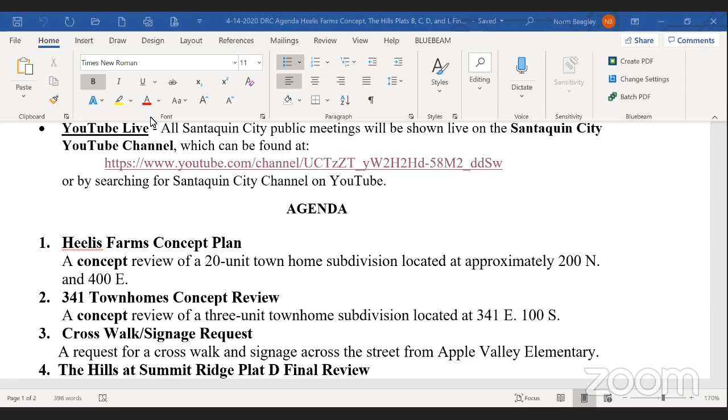Just maximize it, there you go. Okay, so we have Heelis Farms, this is the first one on the agenda, we'll just go around the table. Want to sound check Jared and Scott? Jared and Scott, are you guys with us? Yes. Jared West, Scott Peterson, are you with us on this call? I see Jared. Audio on, Scott was there but now I don't see him. Penny, can you turn on Jared's audio? It is on. Okay, we're going to go ahead and go, Jared, hopefully you can hear us.

We're going to go ahead and start on Heelis Farms Townhomes. This is the development on the north side of 200 North and east of 400 East, just north of where the grocery store is going in on the north side of 200 North. We'll go ahead and go around the room and discuss any concerns or thoughts that you have.

Taylor Sutherland with Fire: both driveways here are in excess of the 150 feet, they're both right around 200 feet. So those would both need to have approved fire apparatus turnarounds, or possibly be connected in some way. Along with that, with the width of the driveways through there, there will need to be no parking signs posted on at least one side of those driveways, on the buildings themselves. That's all I have.

Chief, first? I don't have anything.

Public Works, Wade Eva: You've probably got red lines on all the utility plan, right? We do, yeah. And what about the approaches for those driveways, as far as dropping off that 200 North, isn't that fairly steep? Yeah, they'll have to overcome the grade elevation as they come in there, they'll just have to overcome that. Okay, if you've got red lines on the utilities, that's all I got.

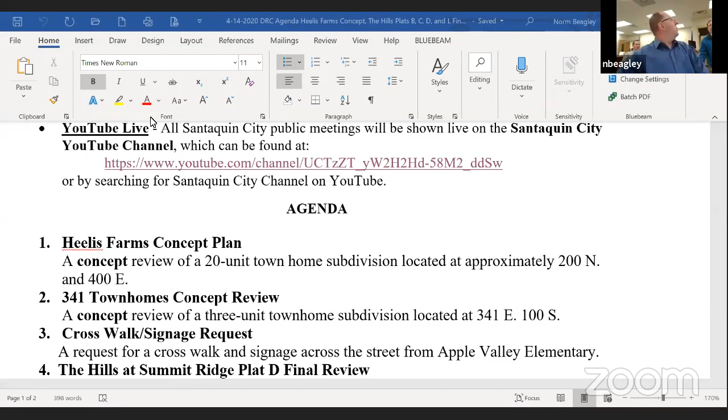Anything from building? Just one question: is that first driveway closest to 400, is that a good distance away from the intersection up there? Is that a problem with the intersection? Sharing the agenda, it's just so you know, I don't know if that matters, but it's not going to show. Okay, I'll stop and share the other one. Thank you.

So now we should have the plans up. As far as the distance on that goes, there is no minimum distance that we necessarily have. We typically like to have 150 feet, but this one is not going to be able to make that. It's not a city requirement or a transportation requirement, that's just a norm that we try to hit.

But in this situation they're not going to be able to have that, obviously. I guess we could look at, with Taylor's comments, maybe doing some type of access up north of lot number 5, where it would come out on 4th East or something of that nature - that might work. That's something the engineering firm might be able to consider, just to get that connectivity we're talking about. Okay, anything else, Randy? No, that's all.

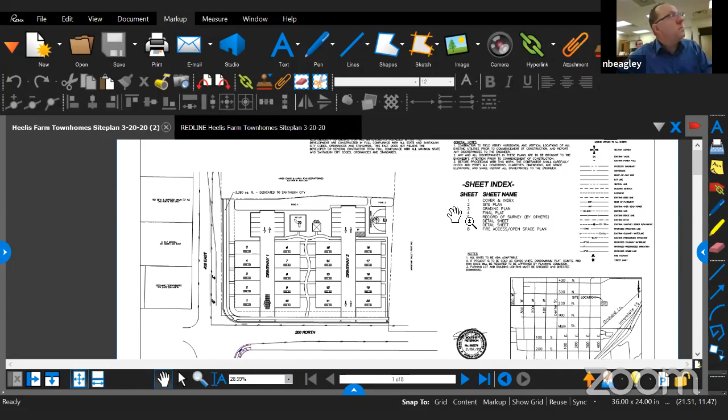Okay, Planning and Zoning. I think it's a good reminder that this is a concept plan, so there's no action taken today. This is just feedback that we're giving the engineers and the applicant so they can do what they need to on the plans to prepare for a preliminary plan. So there's a number of comments from both planning and zoning and engineering, and a lot of it's just generic stuff to give them the guidance they need to work on their preliminary plans.

Just a side note - maybe it's mentioned in the red line - but architectural review will be required, and it can happen really any time in the process. Before preliminary goes to planning commission and city council, it's generally best to do it then, just because both those bodies like to see what the building's going to look like as they review it.

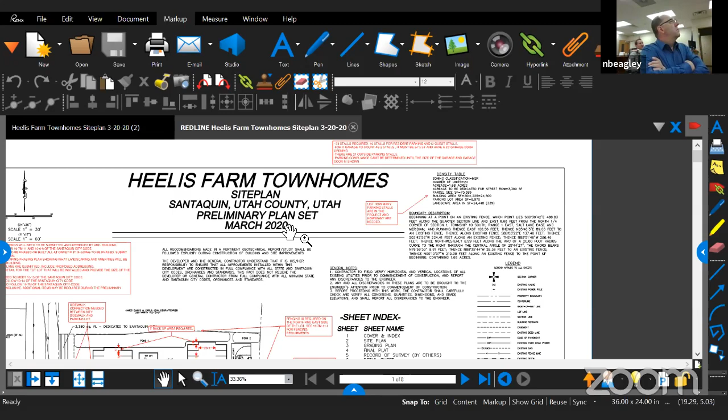Yeah, there's not really much else for us to specifically bring up. We have the generic red lines on there, but not anything that is a really poignant comment that needs to be made in DRC.

Okay, so with that, what I would recommend is, since we're not seeing representatives being able to communicate, Jared and Scott, maybe rather than going through each one of these red lines during DRC, we'll go ahead and email them to you and provide that feedback, and then you can resubmit accordingly with the preliminary plan if you'd like to go that way.

Scott, can you, are you there? Yeah, I'm here. Okay, can you hear? Does that work okay for you guys? Yeah, I can hear you. Well, I think we're fine, unless there's any, I don't know without looking at them, but we can take them and get back to you if we have questions.

Hey Norm, since Scott's in here now, I think the biggest red line for you, Scott, is going to be from fire. So, sorry, Taylor, I wonder if maybe you could repeat your comment, because that's going to be the most impactful red line.

So on both driveways, where they're dead ends, they're both in excess of 150 feet, closer to 200. So those would both require an approved fire apparatus turnaround at the end of them, or some type of connectivity to make it a loop, not a one-way dead end kind of deal.

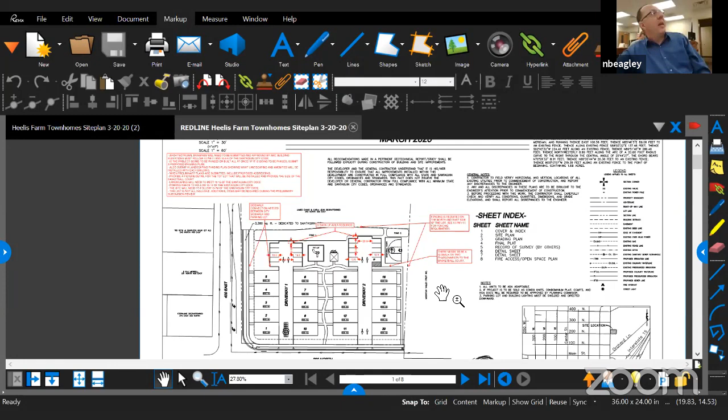Okay, great. And everything else, again, with Jason indicating, everything else is planning and zoning and engineering, just at the preliminary level or the concept level. And we'll just give it back to you, and you can address those comments accordingly. Great, thank you. Okay, thank you.

We'll go ahead, if there's no further discussion, we'll just go ahead and send those back. This is, Scott, this is a concept, so there is no action by DRC. We just give you comments and then you can come back and resubmit accordingly with your preliminary at some point in time.

Okay, and then what about concept, because they go to planning, right? That's correct. So from this point now, Scott, we'll set a public hearing and we'll plan to have you on the planning commission meeting 2 weeks from now. If you can address some of the red lines, that would be great, but it's not required. It's just going to be more additional feedback from the planning commission members.

So obviously there's some things that would need to be looked at a little bit closer that might change the way this flows and the way it's shaped. My understanding is that you guys have more parking than the minimum requirement. I guess you have the qualified 24 by 24 garages, which counts towards 2 parking spaces. So I don't know if you have the option for a hammerhead at the end of those. Those types of things would be good to see as it moves forward.

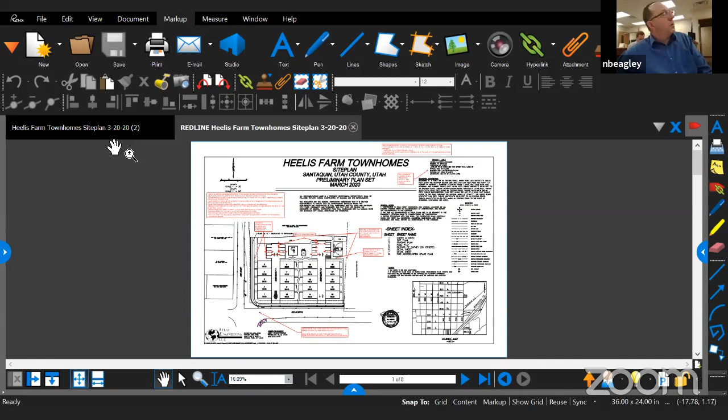Okay, great. Thanks. We'll try to get the site layout updated before then. Okay. All right. Thank you. Thank you.

All right, give me just a minute. We'll get the next one coming up. On the agenda is the 341 townhomes.

We would, Penny, if I'm not sure who the 385 number is there. Do we have a confirmation on that, or do we know what's happening there? Ryan, I'm seeing 385 215 5838. Let's see if we can get that one online.

Norm, I'll find out who that is if you would like. Okay, that'd be great. Ryan Hatfield could be admitted on that one. He's representing the developer on that one, Penny. You can go ahead and take Jared West off as well.

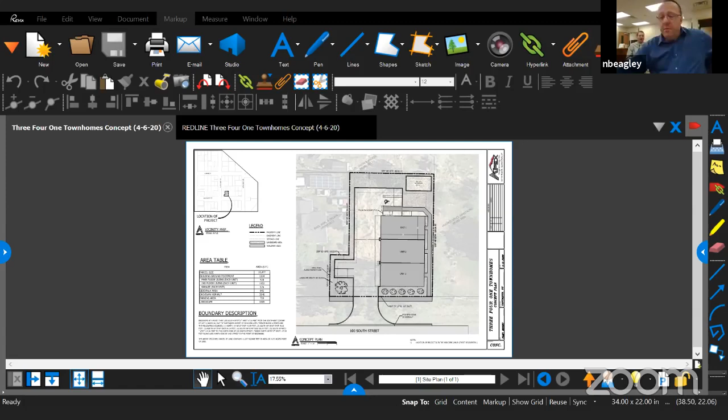Yeah, I was just going to say, it's the same thing as the last one, just feedback. There's not any action being taken today. So again, we have a number of very generic red lines to give them some direction for preparing for preliminary. I guess a couple of things to realize is because this is only 3 lots or less, this could go through a process where the planning commission provides the approval. So that could be a little bit of an expedited process for them.

Let's see. So Ryan, we'll do the same with you on this one. We'll send you the red lines. This is a concept version, and because of that, there's no action taken by DRC today. We will just provide you with the red lines, which are mostly things like parking, right-of-way, landscaping, those types of things. You have any questions on that?

Ryan Hatfield, do you have any questions on that? No, can you hear me? Yeah, I can hear you. Okay, no, I think that's pretty basic. I appreciate your time. I think that's what we were looking for. So I don't have any questions at this time.

Okay, Norm, the other note I was going to make was they don't show a usual trash enclosure for like a dumpster like we've seen with multifamily units. However, with it only being 3 units, they have a designated area for trash, which we're assuming they're going to propose to have 3 cans. I think because it's only 3, I don't have a problem with having 3 cans out on the street. So that's something they provided, and we're assuming that's what they're proposing. But yeah, we're asking for some clarification on that, what style of trash enclosure, because that enclosure is not large enough for a can, and you couldn't get a truck in there anyway.

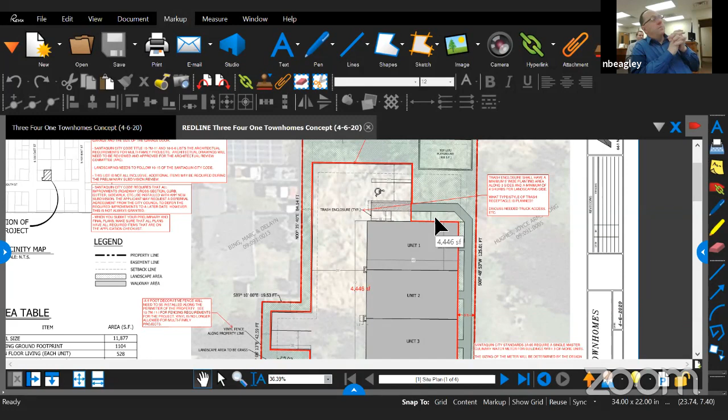Any further comments at this point? Okay, we'll go ahead and send you those red line comments, Ryan. Okay, I appreciate that. Norm, one more comment for you, Ryan.

Because of the zoning you're in, you're going to be required to provide architectural renderings for this. It's not a regular schedule that we have for the Architectural Review Committee, or ARC, it's just on an as-need basis. So if you can look at the code, look at the architectural requirements for the MSR zone which you're in, and provide us some architectural renderings with the details so we can make sure those requirements are being met, we'll work with you to set up an ARC meeting and get your renderings approved. But it's best to start doing that now. We prefer to have those architectural renderings approved before they go to Planning Commission. I guess it's not even going to go to City Council because it could be an expedited process. So we want to see those sooner than later before you go to the Planning Commission for them to consider giving you approval of this subdivision.

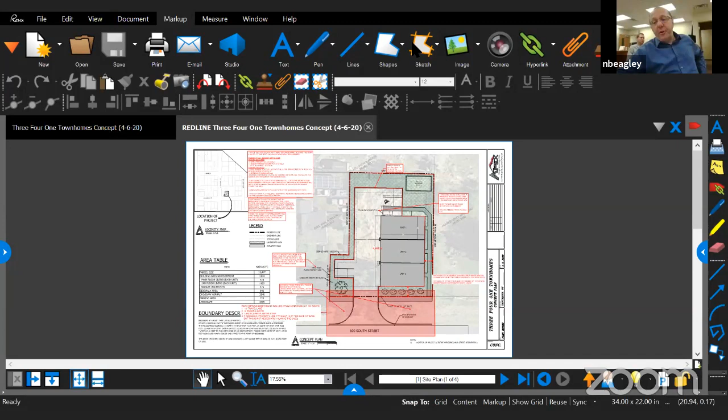However, also keep in mind that should the developer seek a deferral agreement, that would have to go to the council. Correct. Okay. All right. Thank you. Sounds good. Have a good one, have a great day. You too.

Next item on the agenda is the crosswalk request for the area right in front of Apple Valley Elementary. Sorry, I'm getting confused on that. Can you bring up... I'll go ahead and bring up the email. Can you bring up a map? Yes, thank you, maybe in theory.

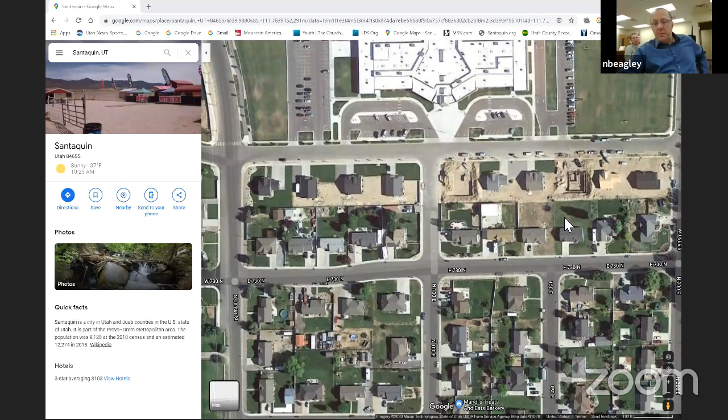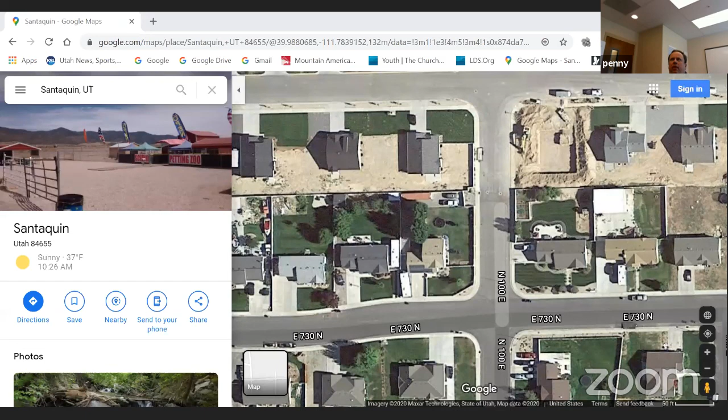Okay. I'm assuming the Bentleys haven't called in on this one. No, no. So if I could kind of walk us through that one, if that's all right. Yeah, are you good? Are you seeing that now, Ben? I am now, yeah. Okay, I can't see the whole school, but that's okay.

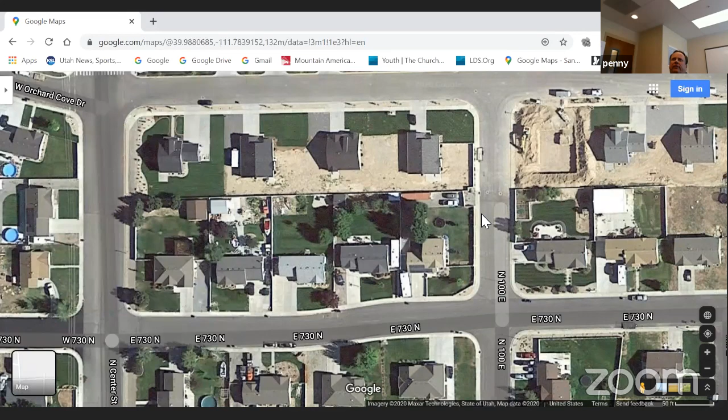The request that came in, perfect, that's great. The request that came in from the school, or from Mr. and Mrs. Bentley, was to have the city repaint the crosswalk that comes out of the main entrance of the school and crosses at a little bit of an angle to that road right there where the mouse is. Originally that was painted, and that paint has long since been removed from the road through snow plowing and other effects, but was never repainted because at the time there was not a sidewalk on the homes on that north, excuse me, south end of that road.

Sorry, I'm getting feedback on myself. Anyway, now that those homes are there, the sidewalk is there. I reached out yesterday to Principal Argyle. He would greatly prefer to see that repainted, and indicated that the school district, him, and his teachers would be manning that in the afternoons. Of course, we don't need to repaint it right now until school restarts, but if the city would be willing to do that, they would make sure the kids are safe in traversing it.

The second discussion requested by the Bentleys was that intersection just south and across the intersection. When we as staff were looking at that originally, we thought that was an unmarked intersection, but in fact it is marked, it does have stop signs going north-south. We can't go out and look at the traffic patterns as they exist when schools open because of the COVID-19 issue, so I reached out to a neighbor of that intersection on the northeast side, Councilmember Nick Miller, to ask his impressions of it, and whether that needs to be controlled. Normally with MUTCD standards, we would recommend that the control would actually be east-west, not north-south.

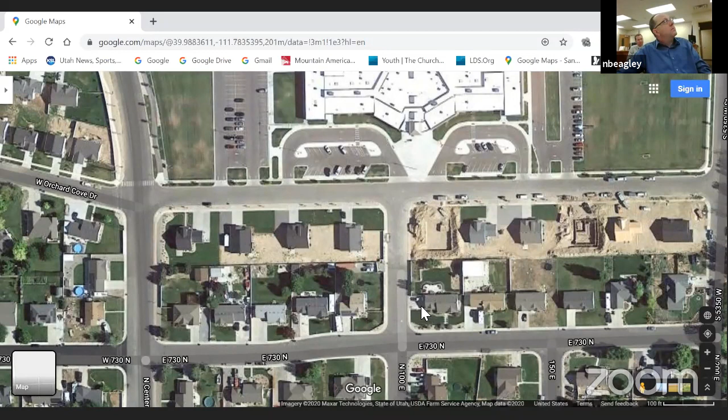Okay, so we have a motion. Do we have a second? I'll second. Second by Rod. Any further discussion? If not, all in favor, say aye. Aye. Aye. Any opposed? Okay, that's unanimous. Thank you.

All right, next item on the agenda is the Hills. We're going to look at 4 phases of the Hills. This is the subdivision just to the west of the railroad tracks on the south side of Summit Ridge Parkway. So I'm going to open up those drawings now. You want to let in who's there? Yeah, let's go ahead and bring Sean into that. Penny.

Okay, so we're going to the Hills, Summit Ridge, getting that open now. Thank you for your patience.

On the agenda today, we have plats C, D, L, and F. Are you there, Sean? Can you hear us? I am. Can you hear me? Yep, great. How's it going, guys? Good, thank you.

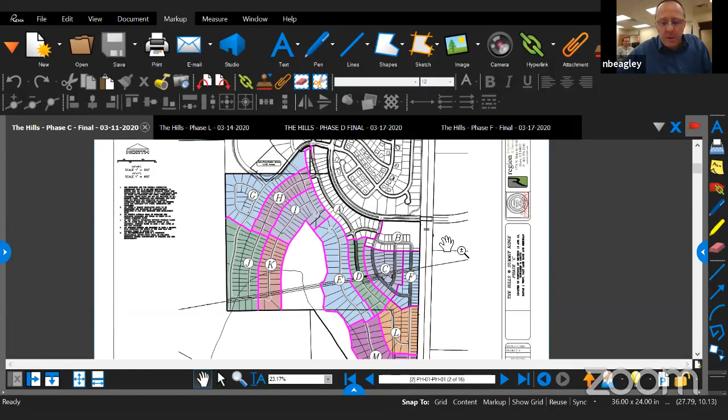That's all I got. We have red lines for some address adjustments, but they're on the red line form. Okay, so we'll send those red lines to you, Sean, for the addressing. And for the sake of time, I think we'll just run through a few of the red lines and then send them up to you so you can consider that to get things going. Does that work okay for you, Sean? That would be great, yep.

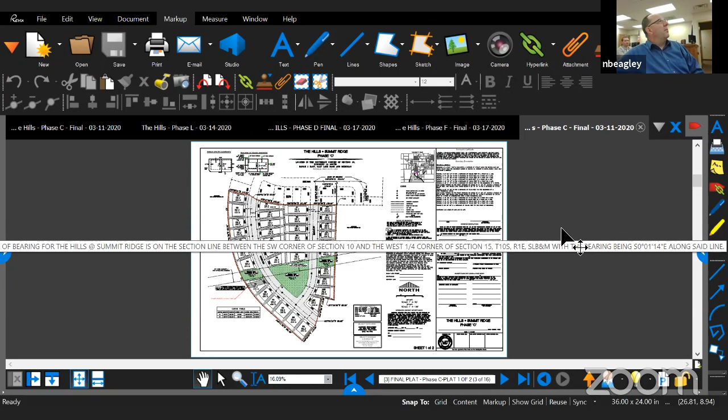Okay, so I'm going to open up some of the other - first we'll look at C. I think the biggest thing with C is that you're still showing the connecting road that's now not going to be constructed, that would connect C to D at the end. That is probably really the biggest concern that we have. And then also some changes on the open space.

The open space is currently under consideration for some changes under the current development agreement that's being amended right now, and we'll have you change those notes accordingly, Sean. To where the open space and the dog park is not going to be owned by an HOA, it's going to be owned by the city, but the developer would improve and maintain accordingly on those areas.

Again, that's - okay, go ahead. I was wondering about that, because was that on council last week? It was on council last week. We're still going back and forth on a few items between attorneys for the developer and attorney for the city. We're very, very close on that and anticipate having that amendment signed within the next day or two and recorded so that this can move forward.

Okay, so owned by city, maintained by developer/HOA, and also improved accordingly. So the dog park would be fully improved, the trail system would just be improved with seating and the trail system that goes through there according to the old amendment. To be clear, Norm, the power line easement, none of that's being dedicated to the city, correct? No, it is. It is? Yeah, okay.

The power line easement and the dog park would get different credits for those. The one is minimally improved. The trail and corridor underneath the power lines would be minimally improved with a road-based trail and reseeding, basically an open space type situation.

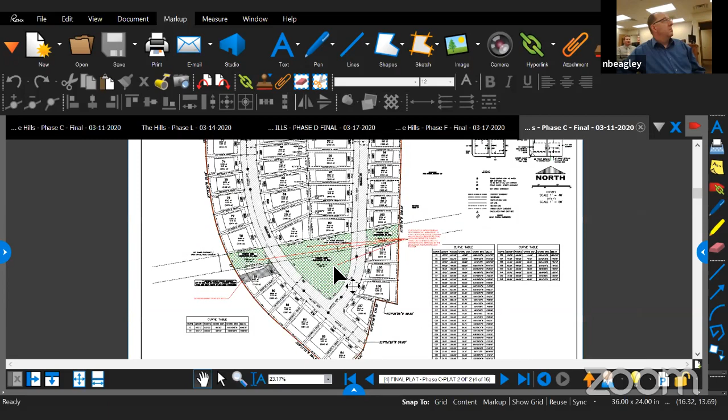Good. Okay, Sean, I was just gonna say, that note on there was just making sure that you're labeling those park areas appropriately, because it still says common area. Make sure it says dedicated to the city, maintained and improved by the HOA as per the development agreement, something along those lines. Okay, thanks.

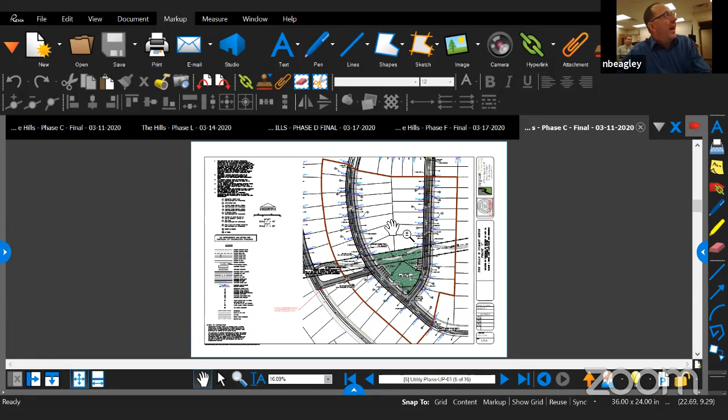Okay, so Sean, also you're still showing a road through here that was, I think, contemplated before between Plat D and Plat C. That's not going to be constructed, is that correct? Correct, yeah, I think these were turned in when that was going to be the way. Okay, that's our understanding as well. So again, there's probably some line work and some pages, or at least one sheet in there, that probably doesn't need to be there.

Okay, with that, if there's no further discussion, I'll look for a motion on this. This is just for Plat C. Yeah, this is final, this is correct. And as Ben indicated, the motion would probably look something like pending engineering and zoning, planning and zoning red lines being addressed.

Pending the execution and recordation of the contemplated second amendment. Norm, I'll make a motion that we approve the Hills Summit Ridge Phase C with the conditions that the planning and zoning and the engineering red lines be addressed, and that it be subject to execution of the second amendment to the Summit Ridge Development Agreement.

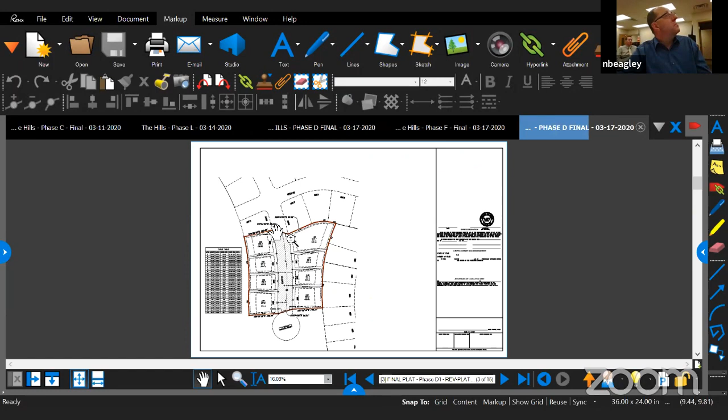We do have a couple of comments on just some cleanup stuff. If I zoom in up here, you can see that we've got some wording and other things that just need to be verified. Then down here, you've got different scales. Sean, you'll need to verify the correct scale.

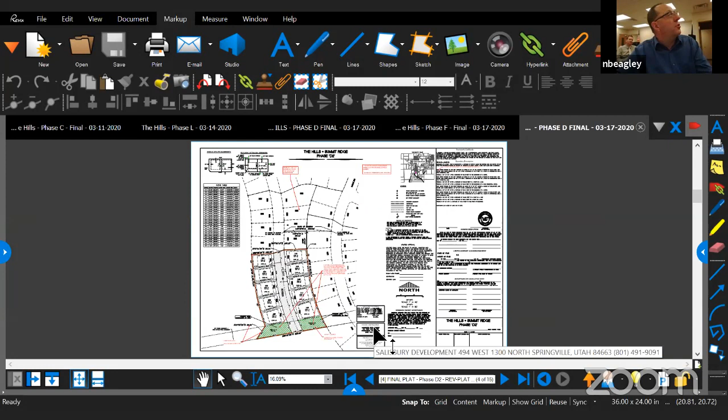Similar comment here where the open space for the trail corridor will again be minimally improved and dedicated to the city and maintained by the HOA. There's some other calls on there, Sean, that are not allowing us to close, so you'll need to address those. Some other notes on the plat just for cleanup.

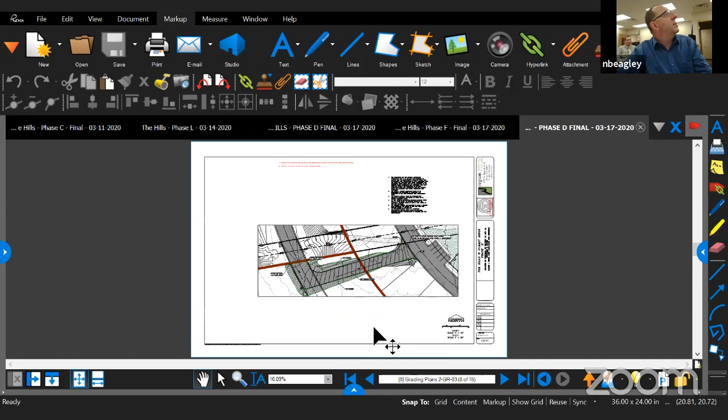Again, that road isn't going to be there. This sheet's probably not needed, Sean, if that road's not going to be there.

With that, I look for a motion. Norm, I'll make a motion that we approve the Hills at Summit Ridge Phase D with the condition that the red lines for planning and zoning and engineering be addressed, and that it be subject to execution of the second amendment to the Summit Ridge Development Agreement.

We have a motion. Do we have a second? Second by Wade. Any further discussion? If not, all in favor, say aye. Aye. Any contrary or nays? So that's unanimous. We'll pull up the next one, which is Plat F, as in Frank.

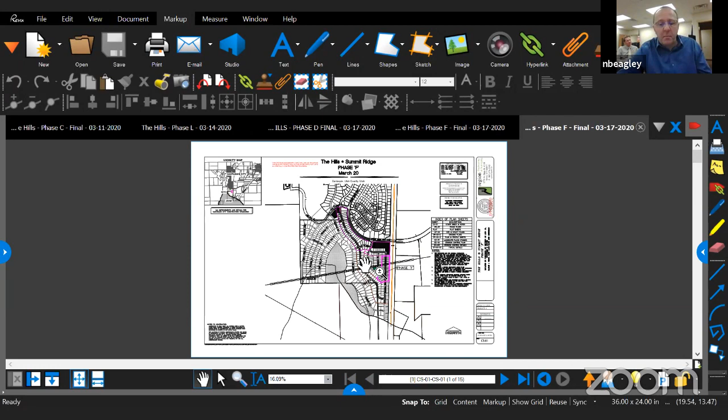Similar comments on this as far as the phasing goes and connectivity and looping. Similar comment on the open space, naming and responsibilities there.

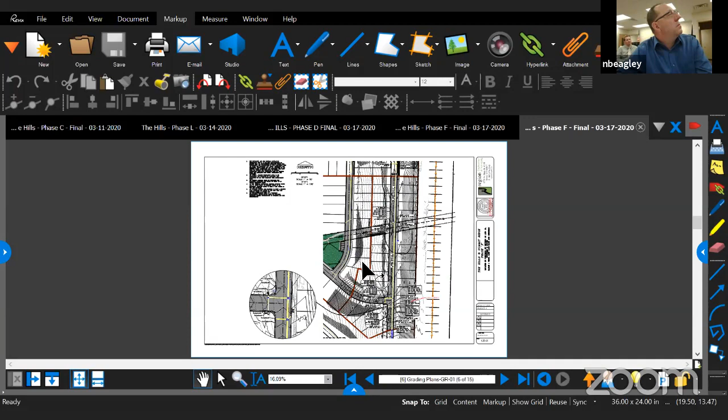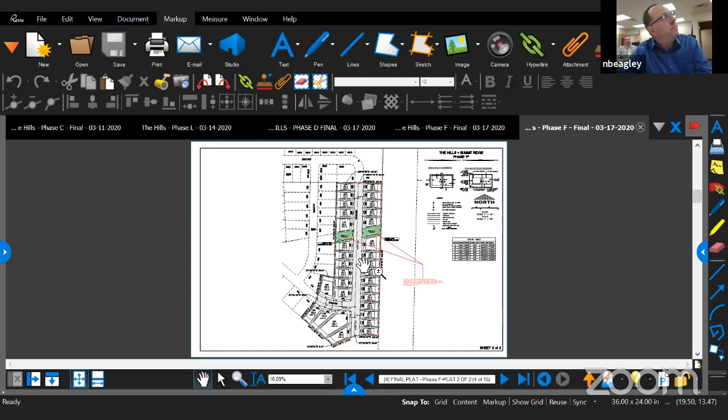What was the, where do we end off with the fencing that was gonna be along the back sides of those lots with the railroad tracks? So they're currently showing on Plat F and L a vinyl fence across the back there. Is that correct, Sean? Correct. Yep.

Is that still what is wanted? Is that the plan? I think we need to have an offline conversation about that as far as durability and what's best there. That's probably something we can address offline with the developer and the sub-developer as well as the HOA to determine what's best there. Just seeing the need for extreme maintenance on the north side of Summit Ridge Parkway and what's already been there for many years, the vinyl may be something that is not as desirable, but again, we'd have to work through that with the developer and the HOA.

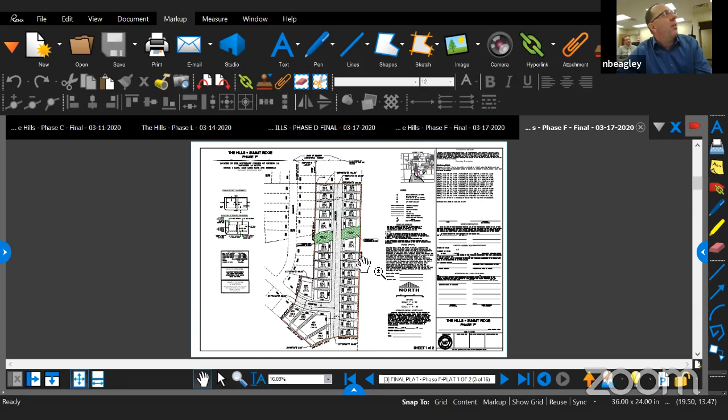Okay. Ben, do you have any further comments on that? I highly concur. Well, I think that's something we can handle offline, but just so you know, they are showing a fence there now, so we can talk about style and durability and other things offline from this, and some type of a substitution. I don't think it would have to come back to DRC. Again, meeting the development agreement and the intent thereof and durability.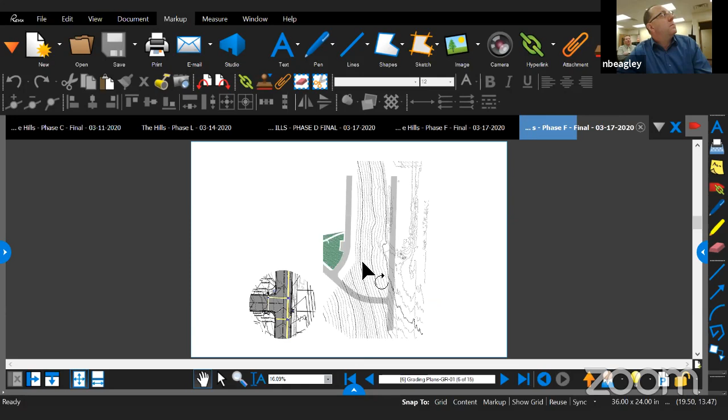I got another comment, Norm. Okay. Hey, Sean, so I'm looking at that corridor open space that's in the power line easement. And if you go to one of those pages that has that, Norm. Okay, let me get there. I'm just making sure I've got the rest of my red line comments taken care of.

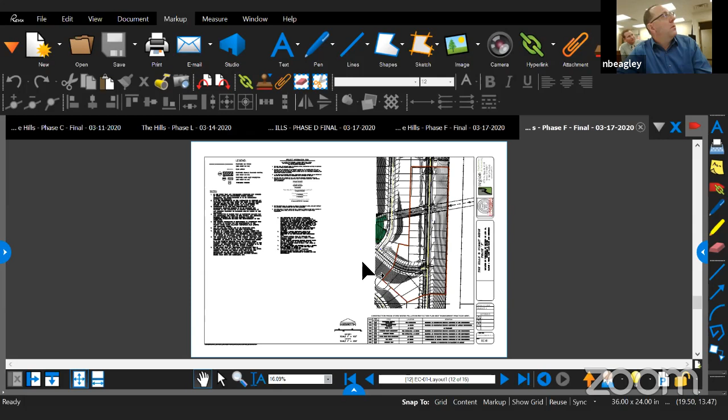You want a site plan view? Is that what you're looking for, Jason? Just the... that'll do.

So you see how the trail just kind of goes and ends at the fence? I don't anticipate we're ever gonna have a bridge over the railroad corridor. That's next to impossible to make happen.

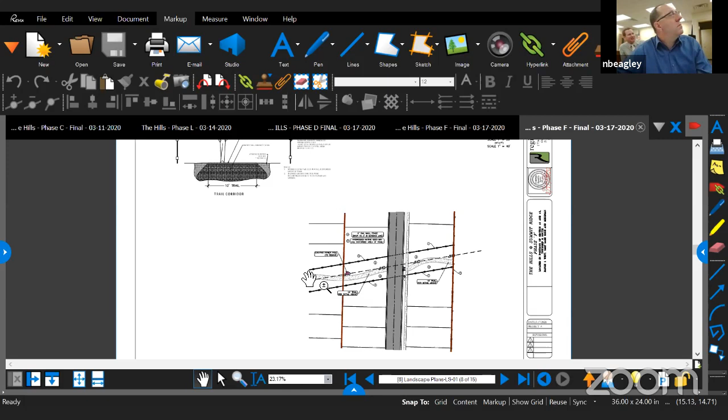So instead of it just dead-ending at that fence, a part of me wonders if we have it dead end to something else that kind of is a bookend for the trail network - maybe a little pavilion or a picnic area or something like that. It just seems funny to have the trail just go right into the end of the fence. It seems like that'd be an opportunity to make it a bookend, an amenity for the residents that live there.

Yeah, I think that's a great idea. I wasn't sure about future extension there. I don't think any one of us would have a problem putting a couple benches or maybe a barbecue area or something in there. I think it's a good idea.

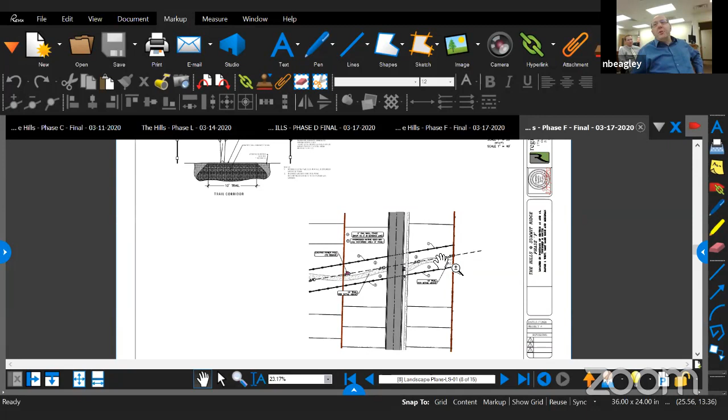That would be awesome, maybe even a bulb out, like a trail cul-de-sac there, that doesn't actually take the trail all the way to the fence and kind of gives an area for some seating, or at least doesn't give the appearance that we're going to be continuing that trail over the railroad tracks. Yeah, I'll put something in.

I think that'll be great. It's a good idea. The other alternative is we'd love to have you work with Union Pacific to build a bridge across that railroad corridor.

Barbecue sounding really good right about now, right, Sean?

Okay, I'll make that happen. All right, I'll look for a motion on Plat F, or Phase F, of the Hills at Summit Ridge.

Anybody else can make that motion? I'll make a motion that we approve the Hills at Summit Ridge Phase F with the condition that red lines be addressed, that it be subject to execution of the Second Amendment of the Summit Ridge Development Agreement, and that specifically the trail corridor in the power line easement be improved with some amenity at that end, and that be worked out, coordinated, and approved by staff.

Okay, we have a motion. Do we have a second? Second. Second by Randy. Any further discussion? If not, all in favor, say aye. Aye. Any opposed? Okay, that's unanimous. One more, guys, on this one, and then we'll get to the next set.

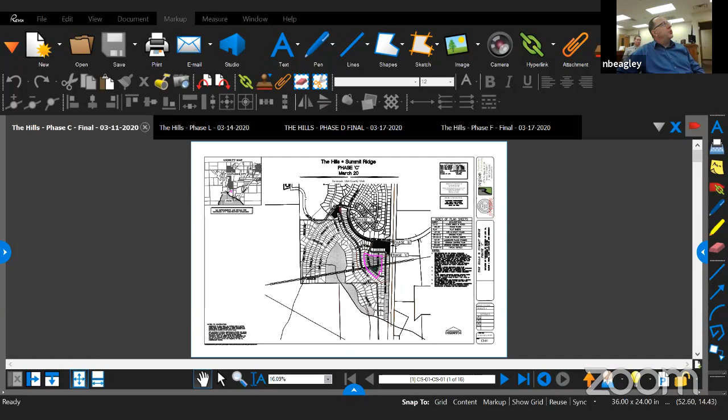Thanks for your patience. So we'll look at Plat L now. Again, this is an extension just south of Plat F that we just looked at.

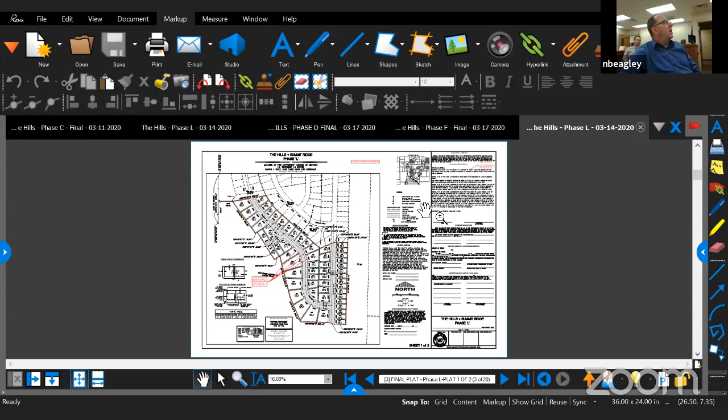So similar comments on this, Sean, as far as connectivity and looping. This one doesn't have a trail corridor. Let's look at this and see what it says. So you've got some addressing comments on there that you'll need to take care of.

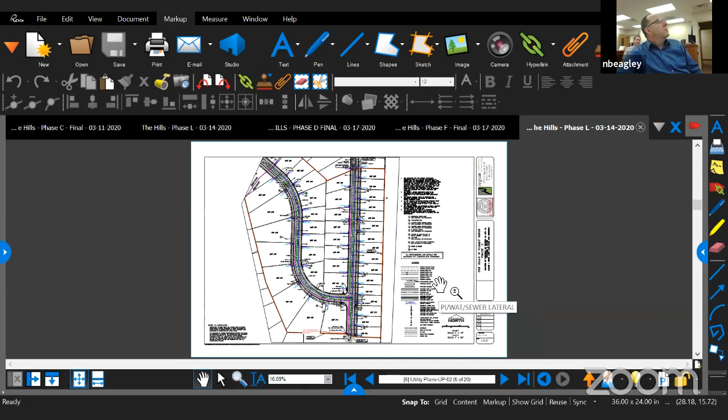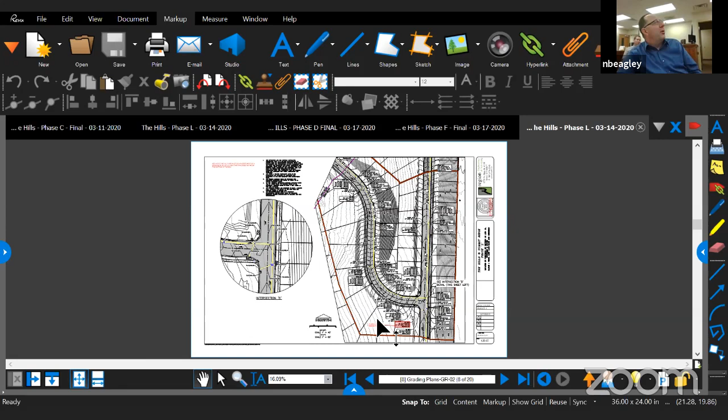Again, the temporary road's not going to be there. Coordinating with the postal service. You need a valve down there at the bottom to isolate water lines. You've got a double curb inlet on one side, Sean, and not on the other because of the distance and the slope there. You're gonna need a double curb inlet on both sides.

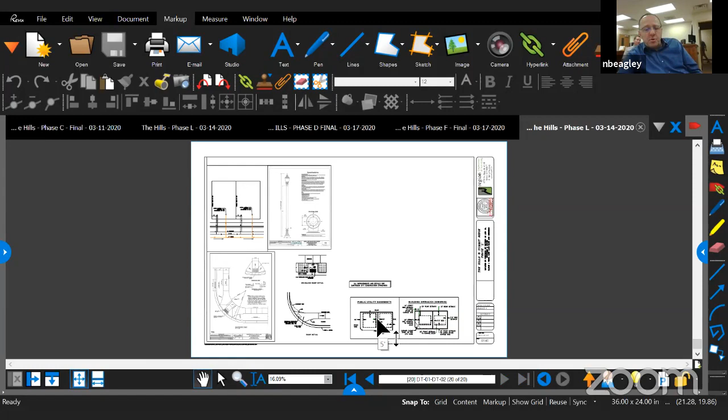Okay, so I'll look for a motion on this one. I'll make a motion that we approve the Hills at Summit Ridge Phase L with the conditions that the red lines be addressed and that it be subject to execution of the Second Amendment of the Summit Ridge Development Agreement.

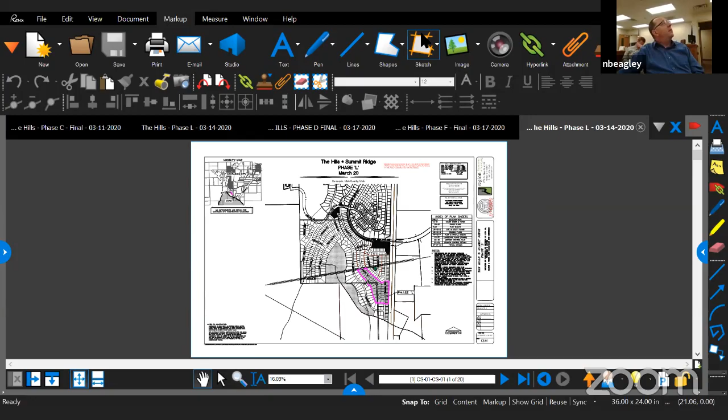Have a motion. Do we have a second? Second. Second by Taylor. Any further discussion? If not, all in favor, say aye. Aye. Any opposed? Okay, great, that gets us through those four.

And we will get back to the last two items on the agenda, which are Foothill Village, Plat L and I. So let me pull those up really quick. Thank you again for your patience.

Let's see, that's not there. I think Curtis is jumping on. I told him it would be a while on the hills, so he's jumping back on. Yeah, if you can let Curtis - and there's also, I think there's two. Yeah, that's all for now. That John Money one, Penny, can go off. That was for an earlier project.

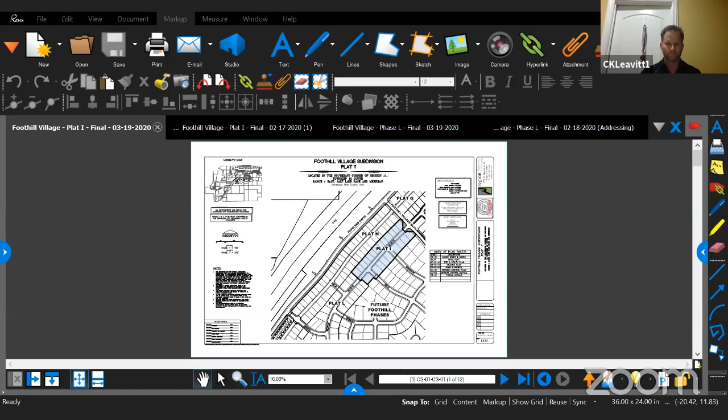Hang on just a second, we'll get this up and get going on these two plats. This is Plat I and Plat L of the Foothill subdivision. For everyone's reference, Plat G is right here, currently under construction. Plat F is just to the southeast, already constructed, and they're building homes on that. Plat G is under construction for the horizontal improvements right now, meaning the subdivision improvements.

So we'll go ahead and go around the room on Plat I. If you have L at the same time, you're more than welcome to put those comments together. From fire: no, I don't have anything.

From police: just a question, are we still on our target date for that frontage road? We are. They have had a pre-construction meeting for everything north of where the old gate was down at the bottom. They can start construction on that, they've already paid their fees. I talked to the contractor this morning, they should be out there within the next couple of weeks to start that construction.

And then we're still working on a few items with UDOT right now, down from where the gate was to Summit Ridge Parkway. But yes, they are on track, and in our red line comments, they understand that the 151st building permit will not be issued until that road is in. I don't have anything else.

Okay, Wade. So just for your information, they have shown a water line looping through the future Plat H, because they didn't meet it before, so they've got that on there now. We have some addressing comments on the red lines, Curtis, that we'll send to you. I think they've been addressed. Okay, maybe they've already been addressed.

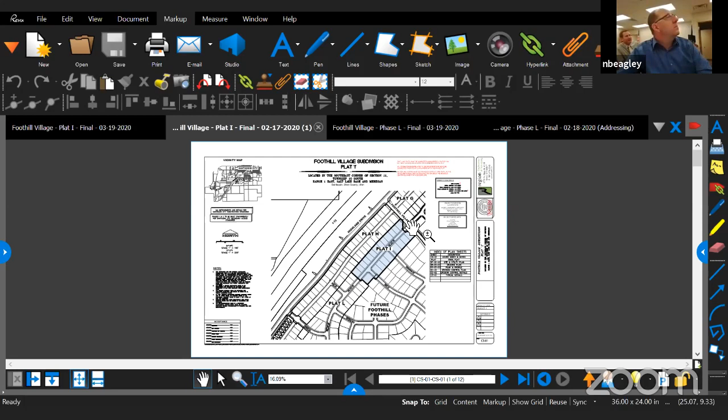So Curtis, just a couple things to make note of for the record. At the north side, northeast end of the road, there's that discrepancy with the right of way and the shape of the lot lines that you have there. That's just going to need to be cleaned up because there's some vacation needed. The city council will need to vacate a portion of that. It's a technicality, but we can take care of that separately and make sure it's handled appropriately.

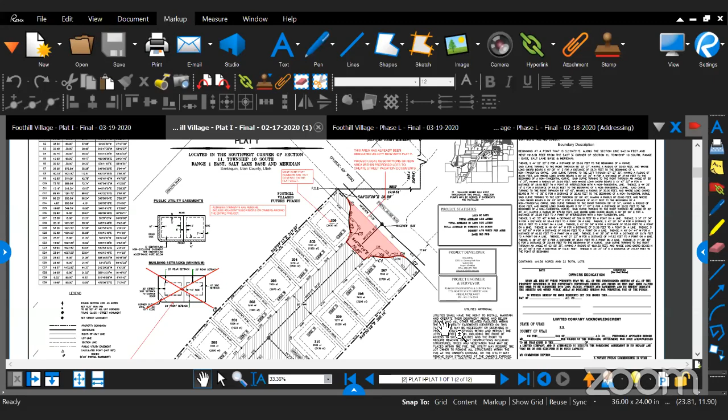Sean, our engineer, is on the call as well. Yeah, Curtis. Curtis, I sent over some legal descriptions, and I think we're working on getting that all cleaned up. Okay, great, thank you. It's mostly just to mention for the record that those things are going to need to be cleaned up so that radius matches the way it should.

And then as well, right there at the end of that road, just to point out that we did move the trail from the northwest side of the road to the southeast side. So there will be that meandering trail on that side of the road that will connect to the southeast, the park that's down there, and eventually down to the Allen Pond area for pedestrian connectivity. So nothing that needs to be done there, I just wanted to make those things known on the record.

Okay, just some cleanup items on the plat addresses. That's an older version. Okay, let me open up the right one then. Sorry, let me get the...

Okay, so same comment still on there about cleaning up that intersection, just making sure. Wait a minute, this is L, sorry, go back to I. One more thing to keep track of. I'd be doing good, it should be I. You got it up there right now. It is, but that's not the non-red line version.

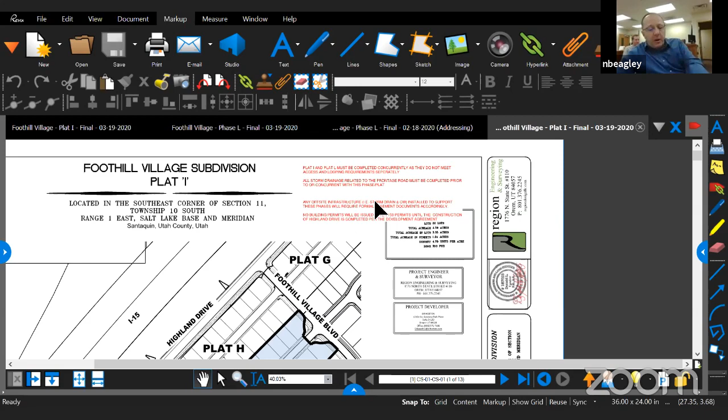Sorry, I'm getting there. All right, getting back there. Just a similar note, Curtis, that these have to be concurrent, and connectivity and looping requirements are met, which you're aware of. Storm drainage to the frontage road is going to need to be in place, and any offsite infrastructure, Sean, we're going to need some easements for that, so that you're aware where that water line is offsite. We're going to need an easement for that, please. I think I'll have to check with DR to see if that's recorded, but I think it's been written up and probably recorded by now. So that goes through this future road in H, is that correct? Correct. Okay, yeah, we'll just need verification and being able to verify what you've got there, please.

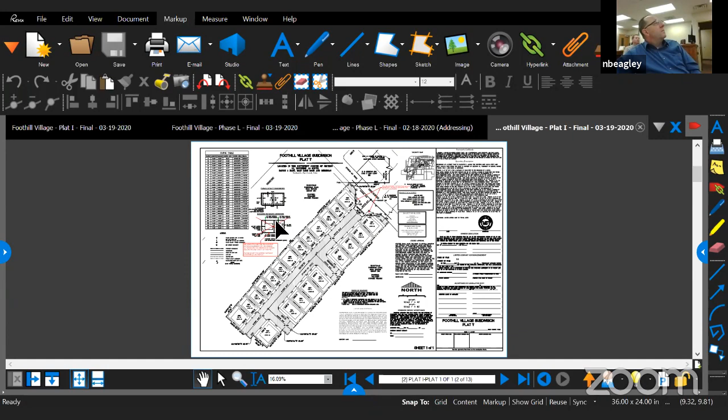The typicals for your setbacks need to be changed, Sean, you're still showing your older ones. While those still do apply, there's other ones, so you'll need to show both sets of setbacks according to the development agreement, the amendment that was done a couple months ago. Okay.

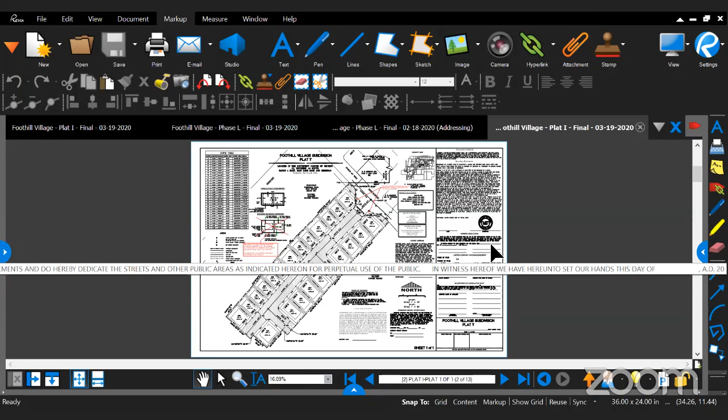Just making sure there's a note here, Sean, to make sure you've got details enough for our depths on our storm drain boxes. We've had issues with that on other developments in the past where they didn't put them in deep enough. We just want to have those identified right on the plans.

This is a sheet we've put in there, Sean, so you can see what we're looking for on those two sets of building setbacks that need to be on the plat.

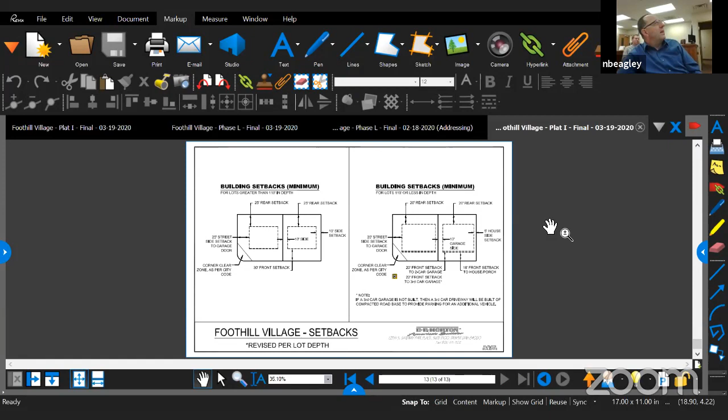So with that, I look for a motion for Plat I of the Foothill Village subdivision, unless there's further discussion. I did all the Summer Ridge ones, so I'll look for somebody else to take the opportunity. I'll make a motion that we accept Foothill Village Plat I with respect to making all the red line revisions and adjustments.

Do we need to add that to the city council for the vacation? I think subject to the city council then, and the road dedication—it would actually be a vacation. Okay, all right.

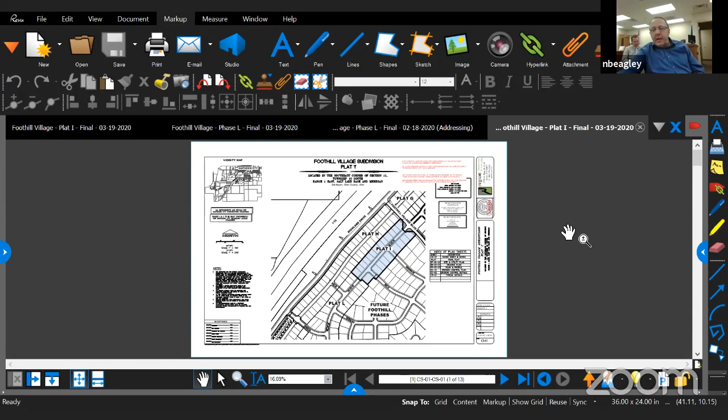Okay, we have a motion. Do we have a second? Second by Wade. Any further discussion? If not, all in favor say aye. Aye. Any opposed? Okay, the next one is Foothill Village Plat L, which is just directly southwest.

We just looked at this one, so we'll go through it. You can see with those two plats they'll have a water line looping through future phase H with connectivity when the road gets done—the frontage road—all the way back up to Foothill Village Boulevard, which is this road right here.

Okay, I don't have anything. Okay, no comments. I just have a question on those city streets—it's going to go over to a private street, right? There are no private streets in here.

In phase H, it's a narrower cross section because you've got smaller lots there, but there are no private roads in here. Okay, I don't have anything. We've already gone through addressing—addressing is good. Okay, Jason, nothing.

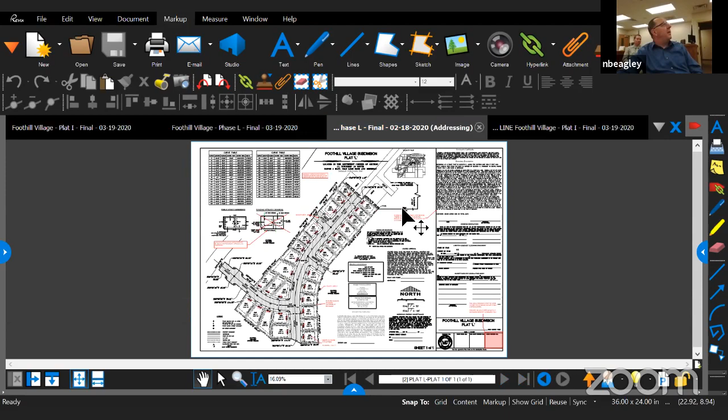Okay, let me look at red lines really quick, guys. I think there's just some cleanup items, Sean, for the boundary description.

Again, the setbacks—is this an older one too? Yeah, I think it's an old one. Okay, let me open up the right one. Sorry, that better be an old one or Curtis is going to fire me. Okay, coming up now.

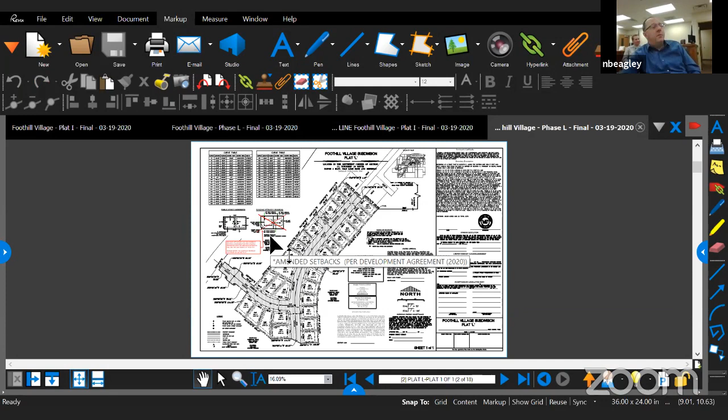Okay, still the setback items on there. Go up a page, see if there's anything on the cover. Similar notes that we had on the previous one, just to cover those, Sean. The setbacks, and I think that's probably it. Let's get through this and see what we got.

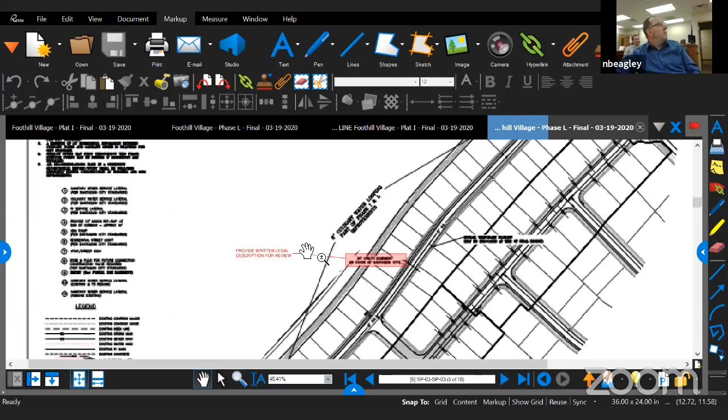Again, I don't think we've seen the legal description for that offsite easement, so we'll look to see that. Also, storm drain boxes—just making sure we've got proper depth on those. That's these three pages here.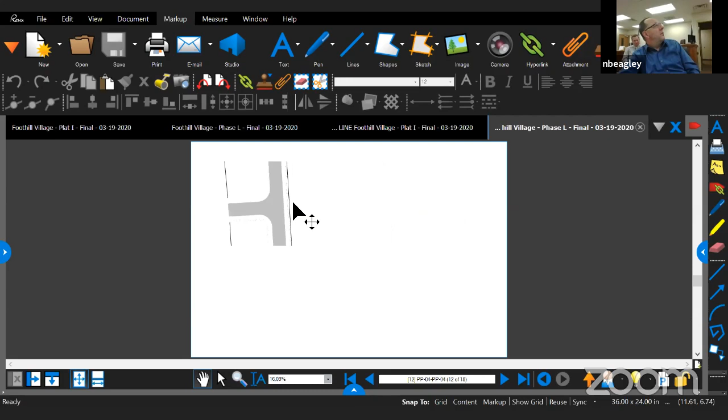Okay, nothing else. I'll look for a motion. I make a motion to accept Foothill Village Plat L, with condition of meeting all the red line requirements.

Okay, we have a motion. We have a second—second by Ryan. Any further discussion? If not, all in favor say aye. Aye. Any opposed?

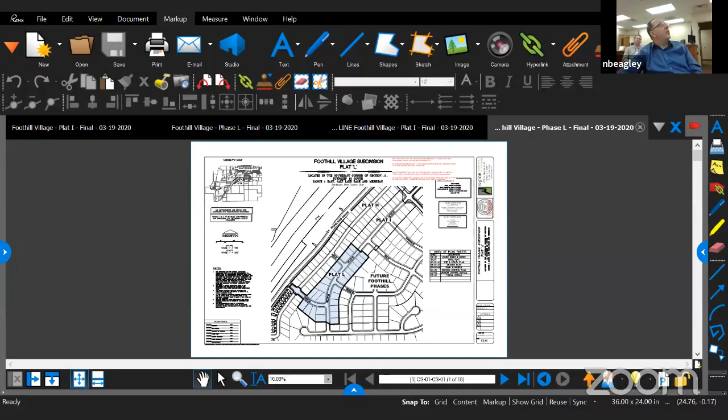All right, the last thing on the agenda is the approval of minutes. I'll look for a motion if there's no discussion. I'll motion to approve the minutes from March 24th. A motion by Taylor, we have a second—second by Wade. Any further discussion? If not, all in favor say aye. Any opposed? Okay, it's unanimous.